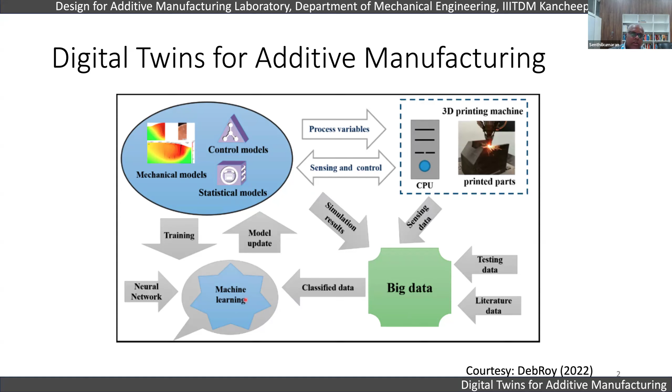So I'll show you what the digital models for a simple powder bed fusion process involve. Starting from the powder flow, powder dynamics, and then how the laser interacts with the powder, and then the fluid flow or thermofluidics of the melt pool, how the melt pool behaves, how the microstructure evolves, and how the residual stresses and distortion form. So a complete coupled model of all this physics is what makes this process much more complex. So a digital twin for AM should consider powder dynamics models, heat source interaction models, melt thermofluidics and heat transfer models, microstructure evolution models, and finally distortion simulation, if you want to understand residual stress and distortion.

In my lecture today, I have focused on studies that we have done on distortion, so I am restricted to distortion, but you can do it for any response. For example, here, the different responses you can study: you can study defects like porosity, gas-induced porosity. You can study grain growth and microstructure, stress and distortion. You can also derive optimized process parameters for a part for any functional requirement.

Right. So for that, from the physical part manufacturing, by conducting a few experiments, you would do a lot of measurements and generate some data, which is sensory measurements and data, like temperature measurements through temperature sensors and other types of sensors. And you also have simulation results. You have micro scale models, which are like melt pool models, mesoscale models, which are layer-wise models, and part scale models. So you need multi-scale physics-based simulation models, and also data from the physical part manufacturing. These are all based on first principles of physics, and this is based on the real-world data collected from the experiments, which actually goes into building the physics-based simulation models.

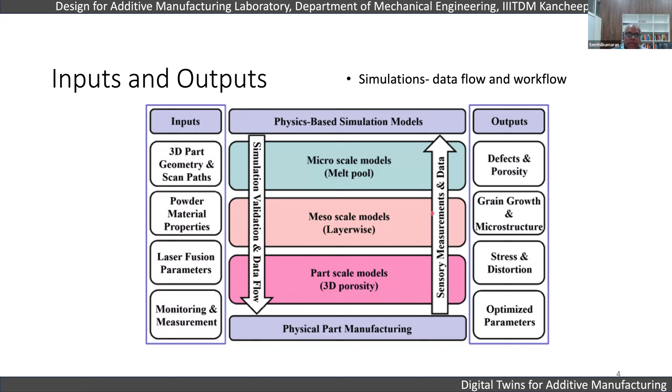In case of a digital twin, you get the same thing. You have the CAD, you have the STL, you have the toolpath, you have the manufacturing process simulation, but you also create a digital twin of it, what is known as a digital system. Here you give the geometric parameters, the material properties, and process control parameters. Then you build a high fidelity model, which is typically a physics-based model.

From that, you run down to a surrogate model, which is typically a faster prediction model, where you have several objective functions, constraints, and a reference trajectory from the domain knowledge, which is given. Now you can use model predictive control from the surrogate model, where you can convert from digital to physical

feedback. So you can see that you have the physical to digital, where you have the measured variables from the physics or from the experiments, and then the predicted variables. They can update the surrogate model parameters in real time. And then you can use MPC, or model predictive control, to control the manufacturing process in real time. So you can see this is a full feedback system using a digital twin.

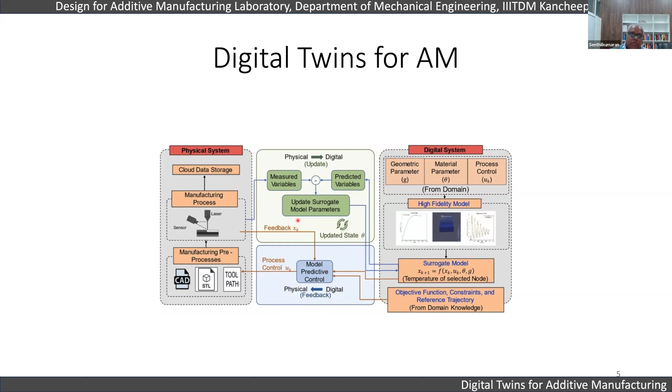Okay. Now in this lecture, I am trying to focus on three important aspects. The first one is how to build such a high fidelity model. And then from those physics-based high fidelity models, how to create surrogate models. And then what are the surrogate models that need to be built for a powder bed fusion process, and how we can use model predictive control on them. This is what we are going to focus on.

So first of all, let us just understand what a surrogate model is. So if you really look at it, as I said, there are empirical, statistical, derived, experimental black box models. And there are white box models because we understand the physics, what's happening. So this is a physics derived relationship, and you have a statistics derived relationship. The black box and white box enter into a gray box, which is data sets that understand the behavior of the system. And some data also come from the literature.

And then we use machine learning models, which are readily interrogatable. You can use supervised and unsupervised learning, especially if you want to do classification and regression, or clustering and anomaly detection through unsupervised learning. And you can also use reinforcement learning to improve the model accuracy and things like that. So you can see that it can be improved.

This is coupled with the sensor data from a physical twin. So in real time, you also have a digital twin to physical twin. Real time data goes into the digital twin. And the digital twin uses model predictive control to control the physical twin. So you can see that this is how the surrogate models are going to work.

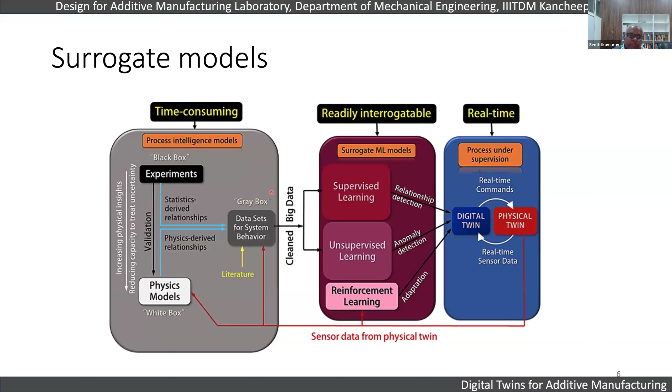So we call this the process intelligence model, which is typically the models which increase physical insights to some level. And this is the surrogate machine learning model, and then the process under supervision. So this is the complete surrogate model. Now, what are the building blocks? This is the overall picture. But when it comes specifically to the powder bed fusion process, what are the different models that we need to build? And what are the connections between them?

Right. So some of the basic building blocks of a surrogate model are a multi-scale model and a multi-physics model. For example, we need to understand the powder dynamics model, as I said, the powder spreading model, which will determine the surface shape, which will be controlled by MPC. And we need a melt pool model; you can see both are in the micro scale. We get the surface morphology and packing density from here.

And then we have a thermal history from the melt pool model, which is taken to the microstructure model. The microstructure model can be used to predict, like Thermo-Calc, other thermophysical properties. And you also use the same thermal history to predict the residual stress and distortion. Thermomechanical properties also come from the microstructure model, because the evolution of the properties is controlled by the evolution of the microstructure. The residual stresses typically happen in the mesoscale, in centimeters.

And structure property relations like cracking, porosity, and lack of fusion can also be determined from the melt pool model. You can get the porosity values and lack of fusion from it. And that could be used to understand the complete process, structure, property, function, behavior mapping. So that could become a full-scale model. This is what we call a multi-scale and multi-physics model. Now, when I say multi-physics, we need to go deeper into the process to see what physics is involved in a typical PBF process.

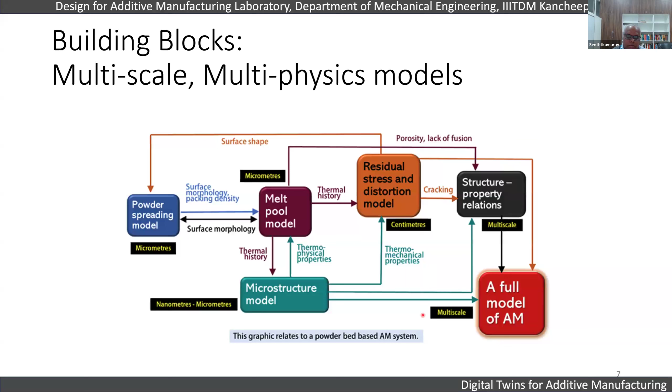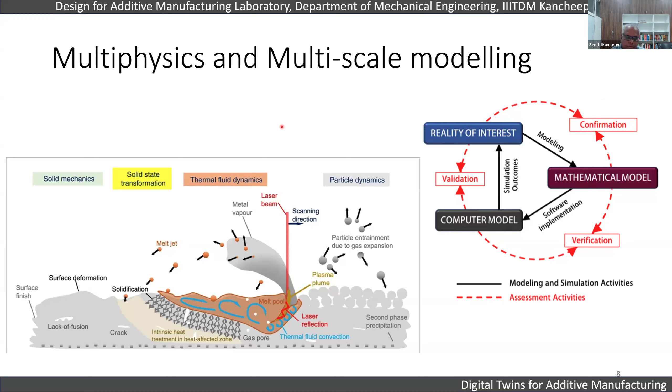So you have to do the validation, confirmation, verification. Once you build the model, it has to be verified with the mathematical model, and the mathematical model has to be confirmed with the reality of interest. So you can see it's a reverse cycle. This is where the modeling input data goes in, and this is where you have to verify the model. In today's lecture, I'm going to show you how we built the mathematical model, how we built the computer model, how we verified it with confirmation experiments at each step.

Okay, first, to start with the thermomechanical simulation. This is the first physics-based simulation that we do. There are many different types of thermomechanical simulation, because when the laser comes in, it heats the powder bed, and it is a thermal process. The heating happens through conduction and convection as well as radiation, which form the boundary conditions. Normally this is solved as a moving heat source problem. You can solve it in many different ways: the simplest is as a Stefan problem, or as a coupled thermomechanical problem, or as an uncoupled thermomechanical problem.

In a coupled thermomechanical problem, you're going to basically change every element after taking the results from the previous simulation. In uncoupled, you first solve the thermal and then bring it to the mechanical simulation, and then update your next iteration for the thermal simulation, right?

So here we have the initial and boundary conditions. The initial conditions are the initial temperature of the powder. The boundary conditions are typically what is happening in the convection, what is happening in the surroundings and things like that. So then we have to model the heat source. Normally, lasers and electron beams are used in powder bed fusion.

So lasers are typically modeled as a Gaussian beam, having full width at half maximum, which has a maximum peak intensity at 1 by e or 1 by e square from the tip of the maximum intensity. And many times they use element birth and death, which is a very old concept, which has been used in many different approaches.

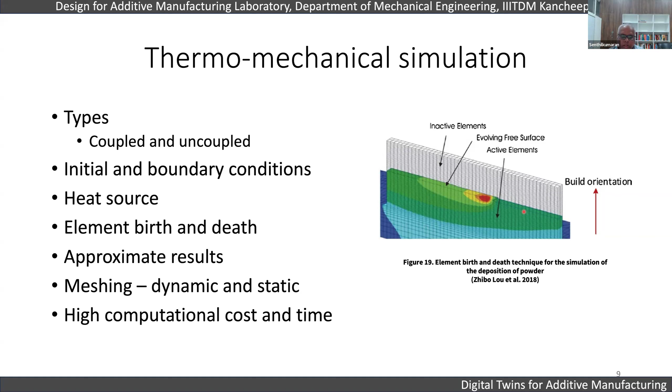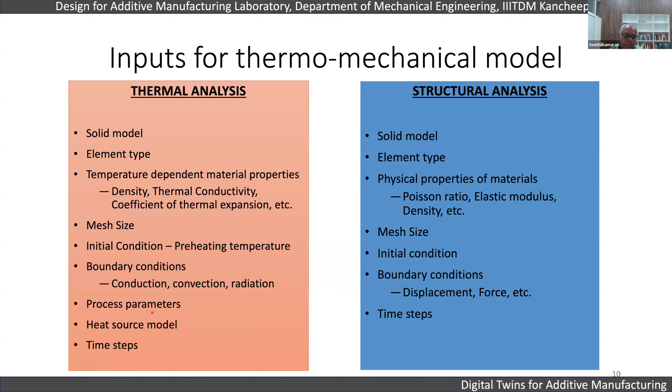So normally you input the solid model element type for the thermal analysis, the density, physical and thermal properties, the mesh size, boundary conditions, process parameters. Here displacement force, here the boundary conditions are convection, and the heat source model is used for the thermal simulation. So normally you take a material model, part model, process parameters, boundary conditions, heat source model, and a dynamic or static mesh scheme.

You do the pre-processing. You iterate for each layer, layer 1 to layer n, depending upon the number of layers in the part. For each layer, you iterate to each scanning track, do the thermal analysis, get the temperature field, apply the mechanical boundary condition, do the mechanical analysis. When that track is done, you go to the next track, until all the tracks for a layer are done, and then iterate for all the layers.

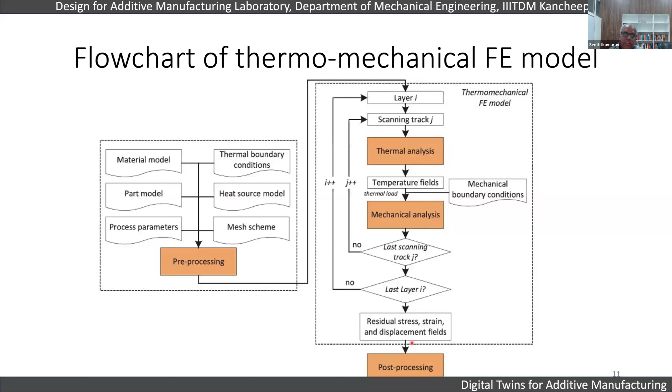Then calculate the residual stress, strains and displacement fields at the mesoscale after you have the temperature field collected over the thermal history, for example T of x comma y comma t, the temperature over time. Then you use that to calculate the residual strain and displacement field using that coupled thermomechanical analysis and do the post-processing to visualize the results.

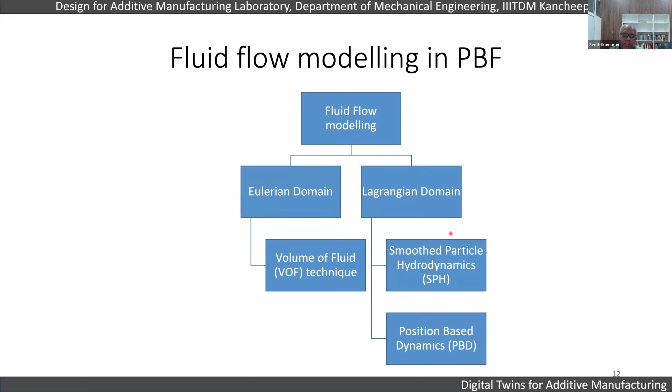So similarly, you also have to do the fluid flow modeling, where you can use either the Eulerian domain or Lagrangian domain. In Eulerian, you can use the volume of fluid technique. Here you can use SPH, smoothed particle hydrodynamics, or PBD, position-based dynamics. So all these approaches can be used. I have not given the governing equations for thermomechanical, assuming many of you are familiar.

Very similarly, here you use the conservation of mass, conservation of energy, and conservation of momentum. And we need to identify the liquidus and solidus zones for the conservation of energy. We use specific heat as a function of latent heat of fusion. So for the liquid region, we define the temperature as above the liquidus temperature. This is the liquid region.

A temperature between the solidus and liquidus is the mushy region, and then below the solidus is the solid region. So we define the liquid fraction and use the liquid fraction for the latent heat of fusion. For example, for most of our material properties, especially powder properties, sometimes we use a bulk property, and they may not be accurate. Then we typically use homogenized material properties for 3D printing, or sometimes the bulk density, sometimes the bulk property, sometimes the powder properties.

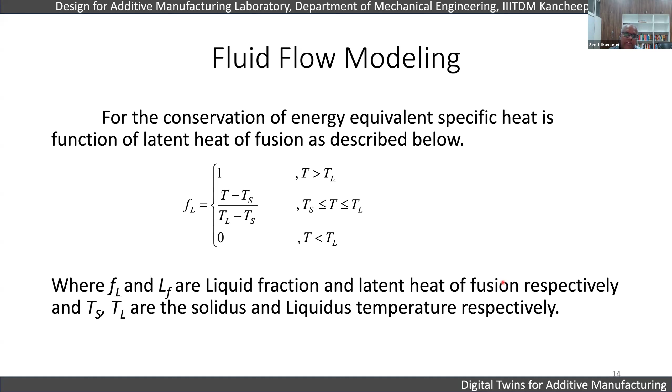But here we also have to use properties which vary with respect to temperature. So we need to take material property as a function of temperature, and then it becomes an implicit modeling scheme. And we solve the conservation of momentum equation. In addition to that, we also give the volume fraction for density. Here you can see the density, specific heat capacity, and also the liquid fraction. All of them are calculated based on the mass fraction of the liquid, from the mass fraction of the solid, and the volume fraction of the liquid. Then we can use these input properties in the simulation to simulate the fluid flow.

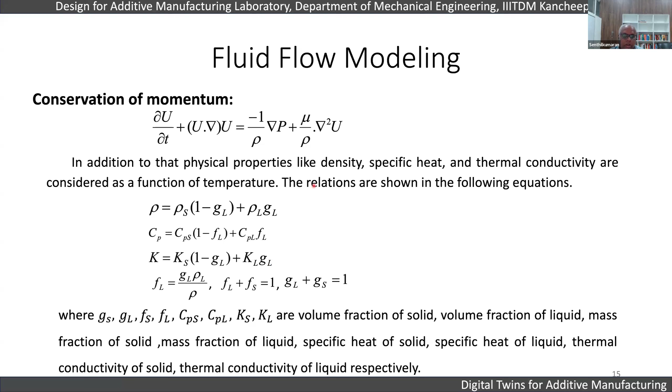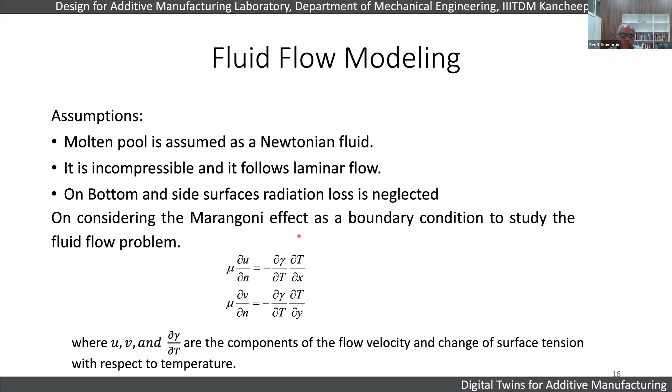And many times, as I said, in thermal and thermomechanical we make a lot of assumptions. Here also we assume it is a Newtonian fluid, incompressible, and laminar. And then we also give an additional boundary condition for the Marangoni effect, which is going to make the fluid flow into the molten zone. So these are the conditions. You can see some of the simulation outputs of the fluid flow, which give us the temperature over time or the velocity over time.

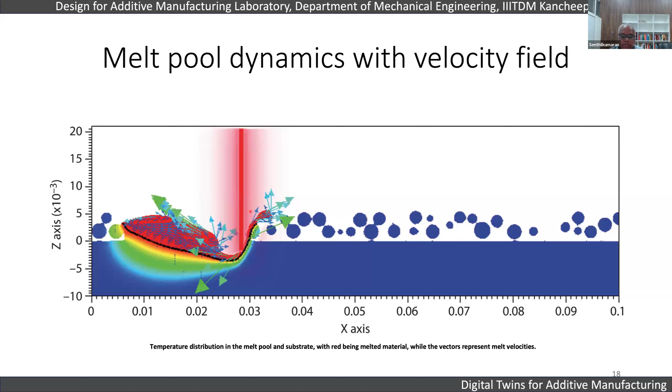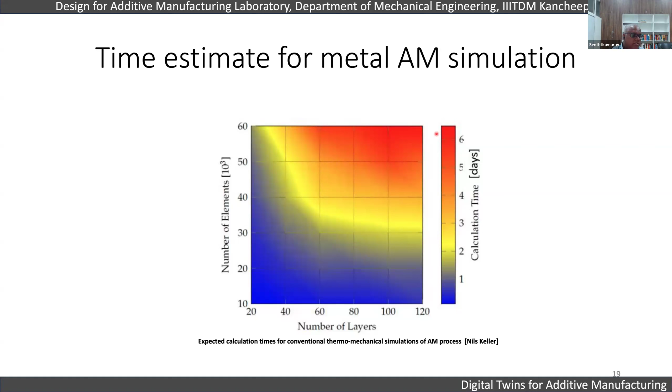So imagine an industry trying to simulate and predict its behavior, and it has to wait for 6 days to get simply a 20 layer or a 120 layer simulation. That is completely unacceptable. So we need to fast track. There are some time reduction approaches. For example, one of the baby steps people have taken is using a coarse and fine mesh combination, called dynamic adaptive mesh refinement. You refine the mesh in the zone of influence: the mesh size is very fine here, a little coarser, and then much coarser where the laser is not there. So you reduce the computational load by reducing the number of elements.

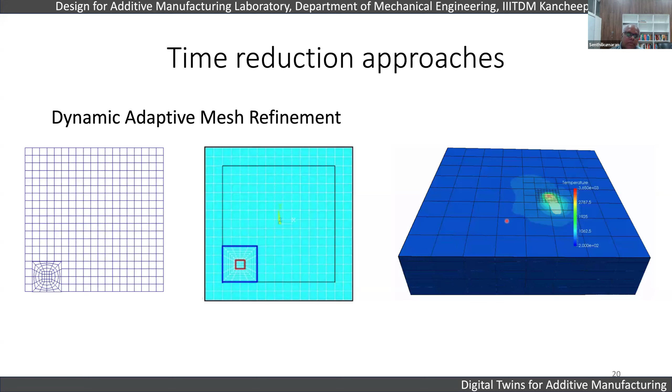So you can see, when you use dynamic instead of uniform meshing, the running time and the file size are shown here. With dynamic, the file size comes down from 7.9 GB to 3.75 MB. And the total running time of the simulation came down almost 5 times, right? So 35 to 7.

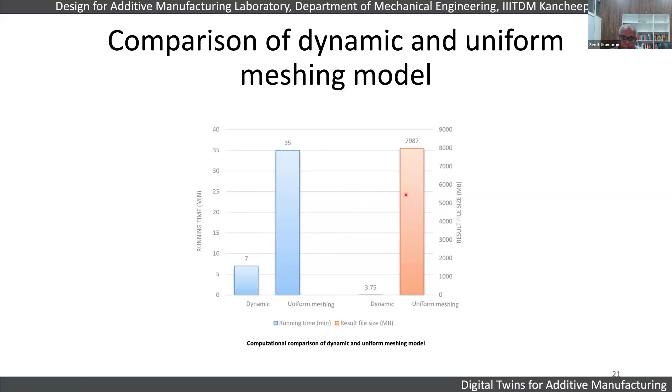So like 5 times. You can see the running time and comparison between the dynamic and uniform. This is one way to reduce the time. So when you use, let's say, a stepwise mesh coarsening, for example, at each layer, each step, you want the step meshes to be coarsened. So you are trying to increase the mesh size after each step, so you can actually reduce the time.

Initially, this is the one approach where you have used uniform meshes for different degrees of freedom. So for 300 layers, the degrees of freedom was somewhere around 1.5 × 10^6. But here, if you use a coarsening mesh scheme, only this is the fine mesh and the rest is coarse mesh. You can see it is reduced to a very small amount of time. So the time reduction approaches are very, very favorable.

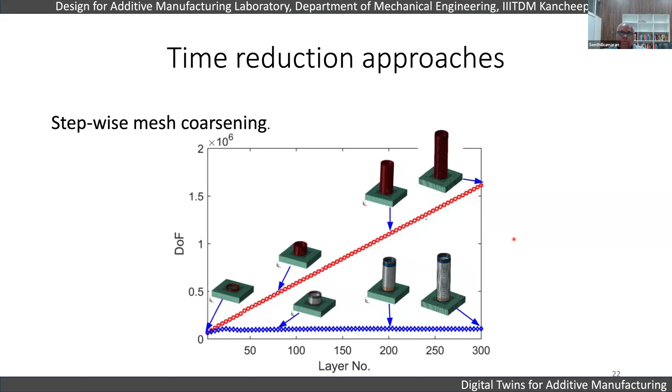And many people try not to do the scanning for individual track paths, but assume each layer is manufactured in one go. This is typically what we call layer-by-layer heating. Instead of simulating the laser movement as a moving heat source problem, people have solved this problem by assuming each layer to be heated and then formed. They had a very approximated simulation wherein the entire layer can be simulated in one go.

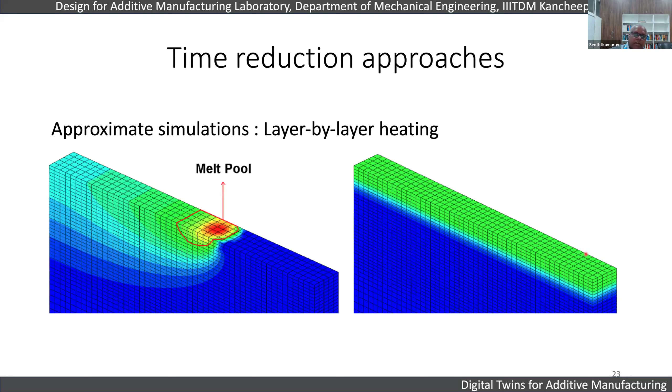So what they did, for a one melt pool simulation, they allowed it to reach an equilibrium condition after a certain time. They built a constitutive model from it, and then they used the constitutive model to simulate each layer. So this is how it is done.

And there are many commercial software you can still use. For example, Autodesk Netfabb, ANSYS 3DSIM, AdditiveLab. I'm not exhaustively listing all the tools, and I'm not endorsing these softwares as fit for the purpose. Just for people trying to first wet their hands with simulations, you can use these commercial tools. The licenses are available; you can try them. What I'm trying to say is you can build your first simulation models using them.

Most of them have come from the academic world. For example, this one came from Professor Brent Stucker, who is the author of the famous additive manufacturing textbook. He worked at ANSYS for quite some time; now he's happily retired. He formed a company called 3DSIM, which got integrated with ANSYS, and it uses a very interesting thermomechanical modeling approach. You can see his papers, how the methodology was developed and integrated into ANSYS 3D simulations.

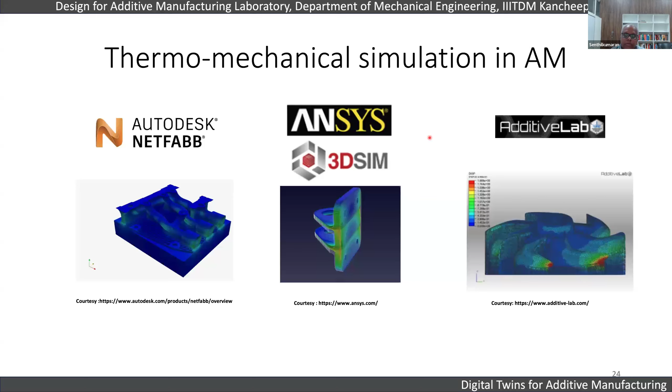And Autodesk Netfabb came from another university. AdditiveLab came from another university. Many universities have developed the simulations, and then they've been commercialized by software majors.

Another important idea that came into macro scale simulations is the inherent strain method. For example, if you want to do distortion prediction, you have to do the thermomechanical simulation, take it to part scale, and then do the residual stress and distortion calculations from the temperature field obtained from the single track simulation. But instead, Nils Keller and others have adopted the inherent strain method.

It's not like the inherent strain method is recently developed. These methods existed for the welding process for the last 30 years. In an inherent strain method, you take an STL file, like a cantilever specimen which has these cantilevers. You input the heating, process parameters, hatching patterns, and material properties, and then you estimate the local inherent strains from the experiments, because you are going to cut this off from the build plate.

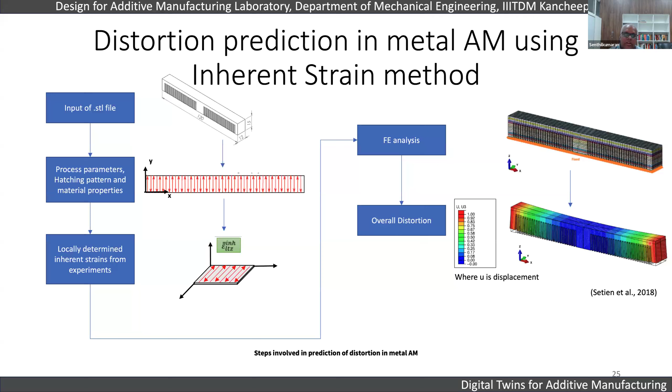So then it is going to basically deform like this. You can see the deformation happened because of the relief, residual stress is relieved. So you measure those strains, and then you solve the inverse problem to get the inherent strain from the measured strain value.

So for that, Nils Keller has developed a very interesting methodology. In fact, his software is also commercialized. So here you can actually do a micro scale heat source model and a mesoscale hatching model. Then you can take those inherent strains measured from the cubic heat sources and put those inherent strains here. So you have a bulk material for the individual layer. You can actually do the inherent strain in the macro scale layer model.

So this is done using simple experiments. You can see that you have different kinds of hatching strategies, and then different levels of deformations you can get. So the scanning pattern has a larger influence on the strains that you can measure. And using the simulation, you verify the measured values of the deviations against the simulations, and then you can use that to calibrate in the software.

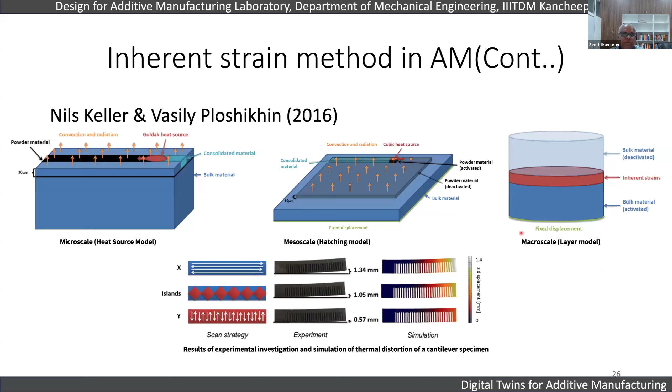So the calibration happens like this. You print the cantilever specimens along multiple directions, like parallel to X, parallel to Y, 45 degrees, and also 135 degrees and things like that. You can print all the cantilever specimens. You can change the scan speed, layer thickness, laser power, scan strategy.

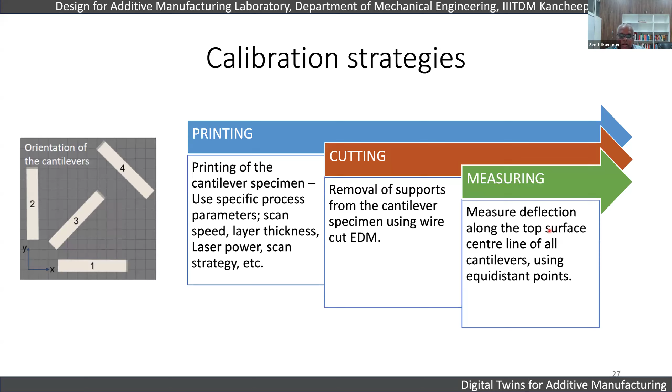And then once you remove the supports from the cantilever using wire EDM and remove it from the build platform, it will deflect. Measure those deflections along the top surface, along the center line of the cantilever, using equidistant points for each of these cantilevers, and then input that into a calibration software. So for example, this is the measured inherent strain. These are the different samples that you have tested: 0-degree sample, 45-degree sample, 90-degree sample.

You input those deviations, whatever you have measured, and then you can calculate the inherent strains, which will be used to calibrate that inherent strain for different calibration steps, like 25, 35 calibrations you can do for different orientations. You can find the maximum target and the maximum deviations from the simulations, and then you can define the layer thicknesses, and then you get a constitutive model. And this model can be used to simulate.

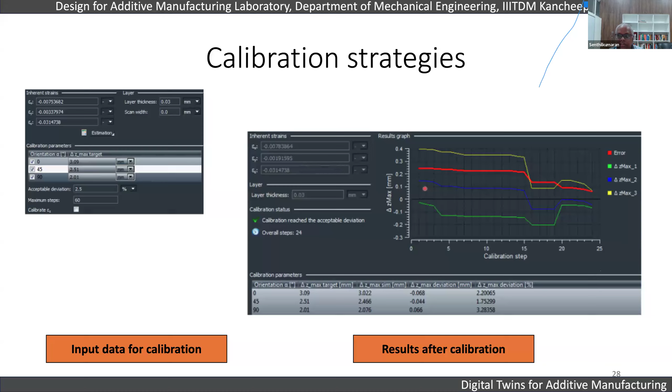Okay, so let me just show you one of the inherent strain methods. I have a huge bunch of slides explaining the inherent strain method. For the want of time, I'll point you to some commercial softwares which use the inherent strain method. For example, Simufact Additive, which also uses inherent strain method based models to simulate, Amphyon from Additive Works, which is Nils Keller, and GENOA from AlphaSTAR. So you can see some of those tools which actually use the inherent strain method. So these are much faster, right?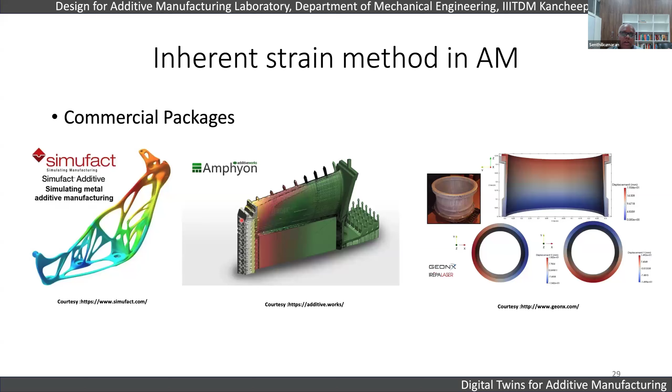And another important thing is, we are doing all this for calculating the thermal history and the fluid flow dynamics, and then we have done part level simulation with inherent strain. But next we need to also look at the structural models, like microstructure evolution models. So how do I then correlate process, structure, property? How do we model them? For that, you need to work in different length scales.

For example, microstructure representation. There are a sufficient amount of publicly available coding schemes; for example, you can use cellular automata, or stochastic modeling techniques like Monte Carlo, or physics-based models like phase field to generate microstructures for additive manufacturing. In fact, from Sandia National Laboratories, you can use the simulation tool that is already available. So you can use already existing open source codes to generate microstructure from AM, and those inputs come from the process modeling.

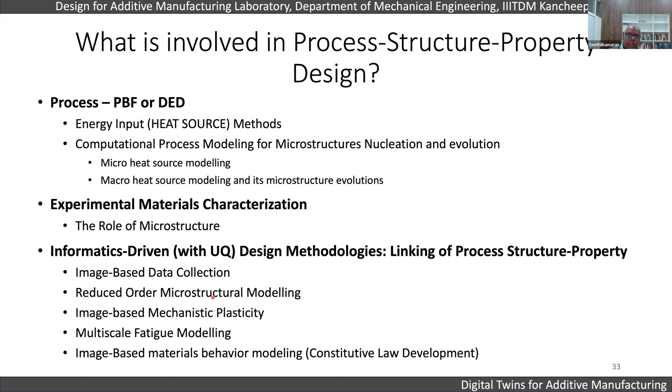And when you do the integrated approach, like for example, when you are integrating the computational tool set approach, right? So we need to understand the process structure. For example, first one is calibration of the thermal response. Second is the microstructure evolution analysis, and then the experimental study of the process parameters. And we have to then create a macro scale thermal modeling. From that, we have to predict the properties like ductility, residual stresses, UTS, and elastic property.

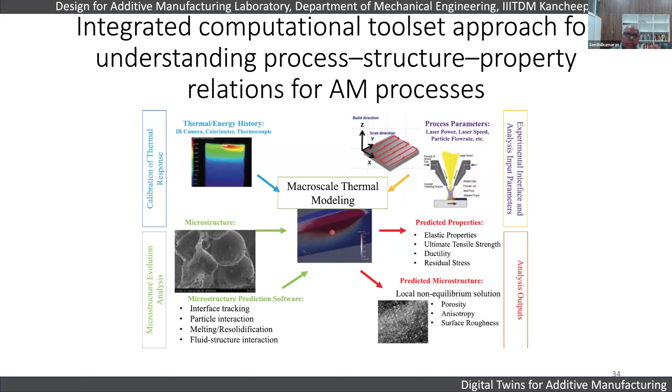And also from the local non-equilibrium solutions, you have to also understand porosity, anisotropy, and surface roughness and all. So you can see that it is a very involved, much more complex teamwork that needs to be built to basically do it.

So when you couple experimental work, for example, when you have a microstructure formulation from process parameters, this is an example from DED, directed energy deposition, you can understand how the fine coupled experimental and computational framework can be used in concurrent multi-scale coupling. That means you are taking results from the macro scale and then using those results in the micro scale, and then again taking the data to the meso scale to basically again influence it in the macro scale.

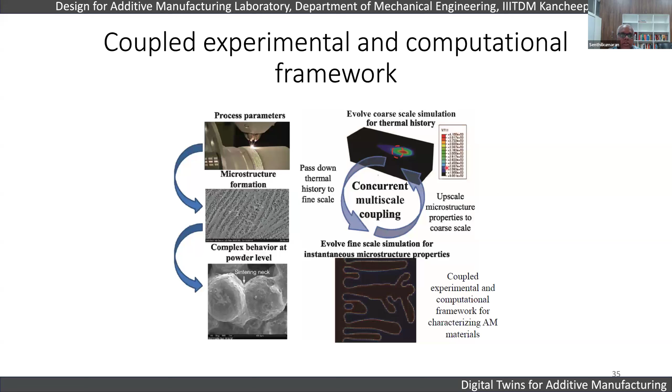So this is the coupled multi-scale where you pass down the thermal history to each fine scale over time, and you upscale the microstructure property to coarse scale. For example, from the micro scale, the properties are upscaled to the larger dimension of the coarser scales, but the thermal history is passed on to the micro scale and the fine scale. So you can see that this is how the coupled experimental and computational framework can be used.

And the linkage is always very difficult to get. For example, you have different process groups like DED, lasers, electron beam, different materials, right? So different thermal inputs and different kinds of process parameters, which results in different grain structures. And you have to test them using coupon testing, destructive testing to understand its mechanical behavior. So the design loop involves finding the optimal process parameters and linking process to structure to property. So a complete link between process, structure, and property needs to be established.

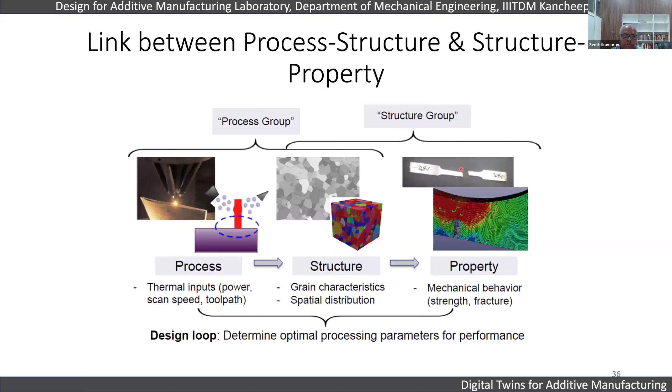So a lot of experiments are also needed while you get these results. For example, sometimes you may not get the result that you want. Your residual stress predictions may not be proper. So you need to use a lot of characterization techniques, microstructure characterization and mechanical characterization for strength, toughness, creep, fatigue. For microstructure, we have to use SEM, EDX, EBSD, TEM, AFM, and XRD.

XRD is a very low-cost technique for measuring residual stresses on the surface. If you want to measure subsurface residual stresses, you can go for expensive methods like neutron diffraction and other methods. So you have to employ these characterization methods to validate your scale-to-scale transformation of the property to function.

And also you have to use mechanical characterization to basically qualify the process to structure relationships, right? So these are all to be used. From process to structure, we have to use this set of characterizations. And then in properties to performance, we have to use this set of mechanical characterization tests. So this is how someone doing research to build a digital twin has to focus.

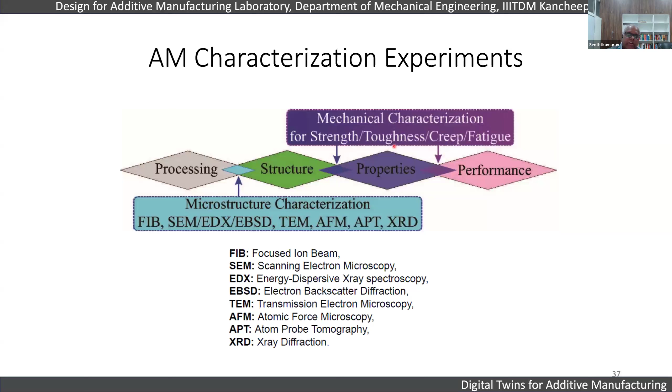Okay. So next I'm going to show you some basic work that we have done in the building blocks leading to multiple physics, in our lab. These slides are from one of my doctoral students, Dr. Hemnath, who graduated a couple of years ago. His approach was an FEM simulation for temperature, and he simulated thermal data sets for various process parameters, and he used a machine learning algorithm like GPR, Gaussian process regression, to predict the thermal history. And then he used mean absolute prediction error to check the validity.

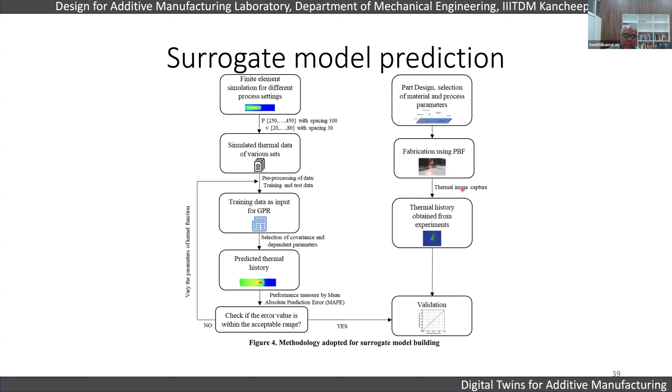And he simultaneously did the fabrication using PBF. He input his thermal data obtained from the experiments to fine-tune and validate those results. So this is how he has done it. The overall methodology is like this. You build a surrogate model at different scales. We built not just a surrogate model in one scale, but this is for the micro scale, this is for the meso scale, and this is for the part scale.

For example, in this scale, we built a temperature prediction model from the surrogate model. And we also built a distortion prediction model here. And then we used shape descriptors assessment for shape description. So we used temperature prediction models where we did a FEM simulation, simulated thermal data for various data sets, and trained and predicted thermal history. So this is the first part.

And the second part, we did this to prove that it works in the mesoscale. We took some complex structures which are very unique to 3D printing. One of the things that we selected is a strut-based lattice. You can even choose surface-based lattices, but we used strut-based lattices to prove that a distortion prediction technique can predict faster for those kinds of very intricate geometry. So that's the methodology that we have adopted.

We designed the unit cell for the lattice structure, simulated the residual stress and distortion. We generated the data sets, and then we trained using an artificial neural network model, which is our surrogate model for the meso scale. And then we very uniquely defined something known as shape descriptors, which can even fast track the simulation by evaluating 2D shape descriptors from the 3D part.

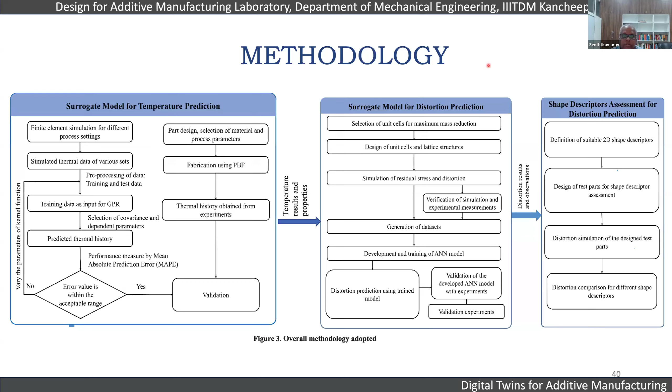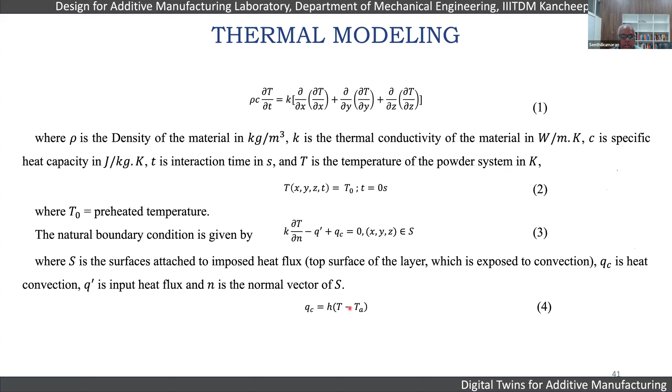So thermal simulation, first we started with the thermal modeling. We started with this energy balance equation for a three-dimensional heat conduction problem. And this is the initial condition, initial temperature, and then the heat source is modeled as a moving area heat source. And then we defined other boundary conditions like convection and radiation. So this is the normal way we build a FEM model.

Then we defined the Gaussian distribution function, since the heat source is modeled as a Gaussian heat source, and we trickily used velocity here. Since it is moving along x, we used velocity along the x direction. So as we increase the velocity, we move the laser along x, so x gets varied when the velocity, speed, and time get varied. So for each time step, we are able to move the laser over the path.

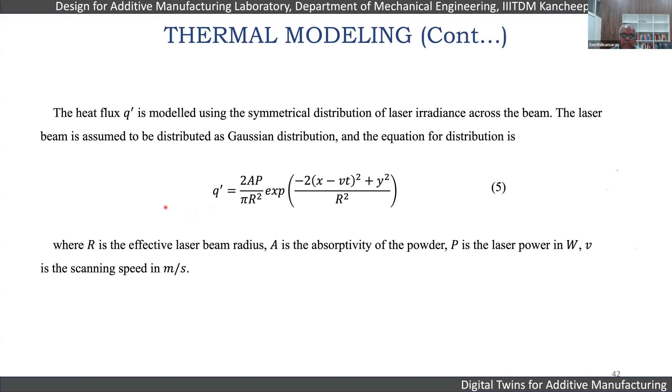And we also calculated the absorptivity based on a particle dynamics model. The absorptivity typically influences the total energy input. So from the particle dynamics model, we calculated the absorptivity, and that is effectively used here as the absorptivity of the powder. And then we have used this expression with laser power, and Q prime is the distribution of the heat flux, which is to be input in ANSYS.

So we made certain assumptions here. We use the laser beam as a heat flux with a Gaussian distribution, and the material we have considered isotropic for simplicity. And absorptivity is considered to be the same as that of the solid material. As I said, the absorptivity of the powder we calculate from the particle dynamics, and then we created an equivalent absorptivity corresponding to the same solid material.

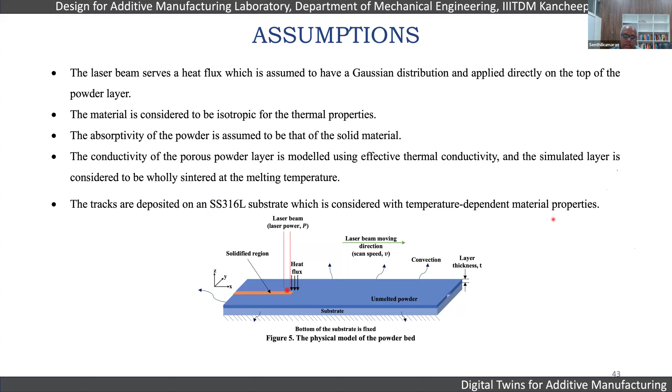The conductivity of the porous powder is modeled as effective thermal conductivity, taking into account the powder particles. We took the conductivity of the air plus the conductivity, we know the volume fraction, the packing factor of that powder bed, and then we used the effective thermal conductivity as a material property. And then we used an SS316L substrate, with temperature-dependent material properties.

So what we did is, as I suggested, we have the input process parameters as different feature vectors, and we ran multiple simulations, and we understood the dependence of the dependent variable, the temperature, on the different process parameter inputs, and then we trained the surrogate model. And then we are able to get an output. Simulation is a very expensive way, but by training and employing a surrogate model, which is relatively inexpensive, we are able to improve the efficiency of the analysis.

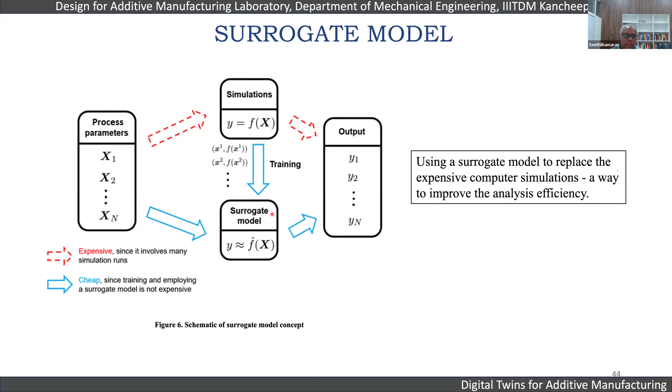In the GPR model, one very important thing is how to do the hyperparameter tuning. So we use the Matérn 5/2 kernel function. After we tested many different functions, we found the Matérn 5/2 kernel function to be more effective in the case of temperature prediction. We saw this during our hyperparameter tuning. This is the covariance function that we have used in the Gaussian process model.

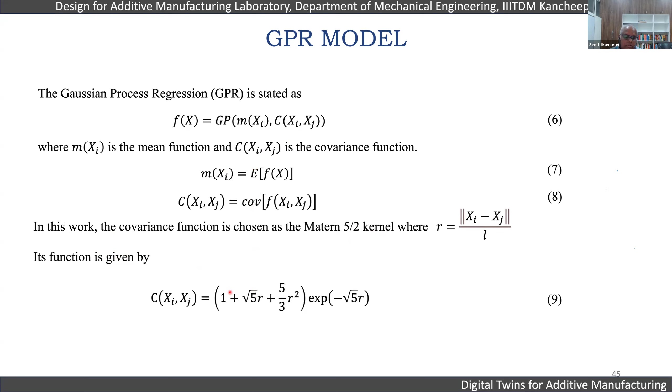In simulation, it doesn't matter. But for experimental validation, since we are going to do an experiment, you have to choose a material, you have to choose a substrate.

But for simulation, you can do it for any material. But when it comes to validation, you have to pick and choose a material to do validation. So we did some validation studies with the powder bed fusion machine, which is built indigenously in India in RRCAT. We have utilized it because it has got a lot of sensors to collect data, temperature data. So we utilized this particular machine because it has got an infrared camera to capture the temperatures and also do some studies on the powder bed. So this is the bed, SS316L.

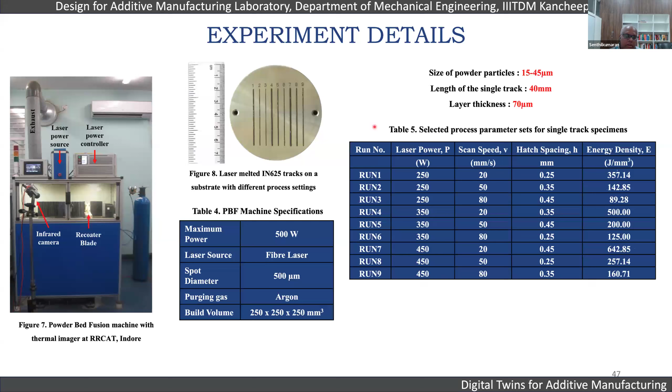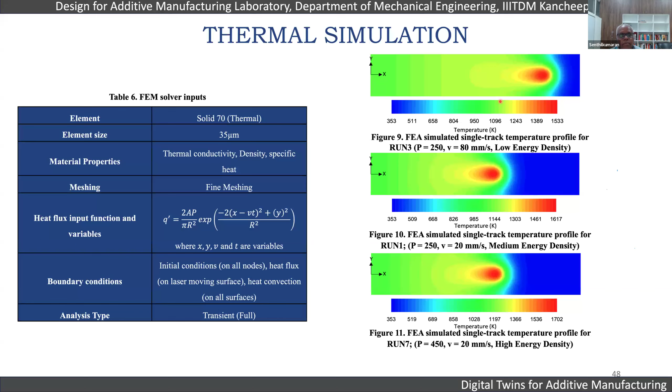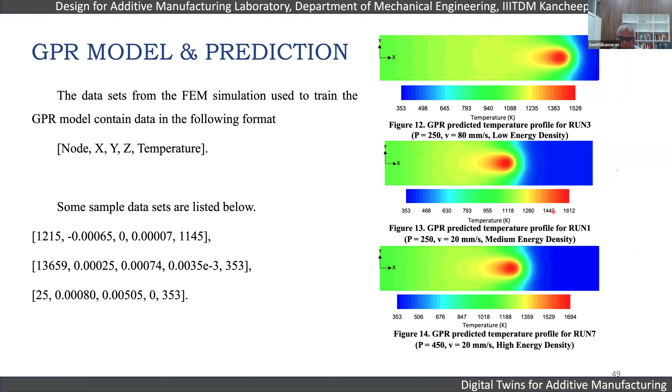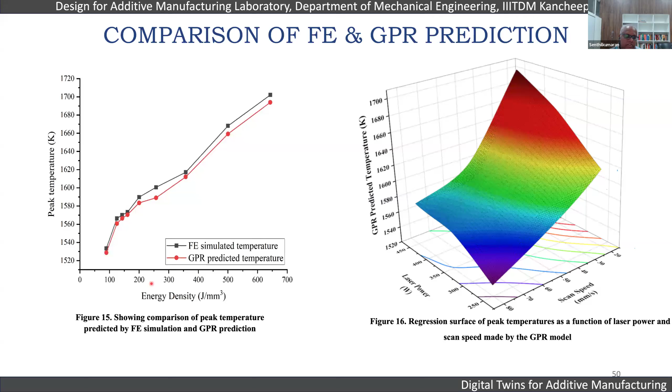For example, the temperatures are up to 1600 to 1700, 1680, which is again the melting point of Inconel 625. You can see a close correlation of the results between FE and GPR predicted over a varied range of energy densities. Energy density is calculated by P by V into H. So this is the peak temperature that is being obtained.

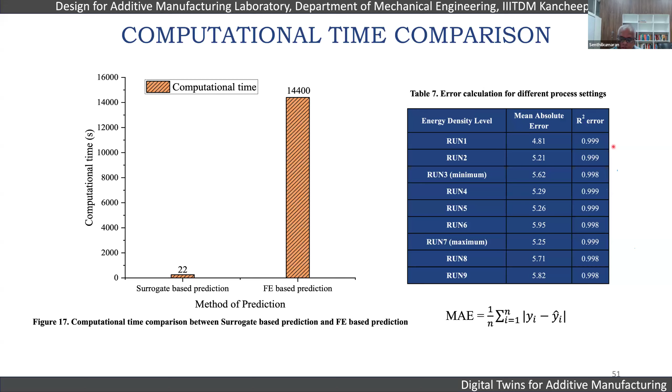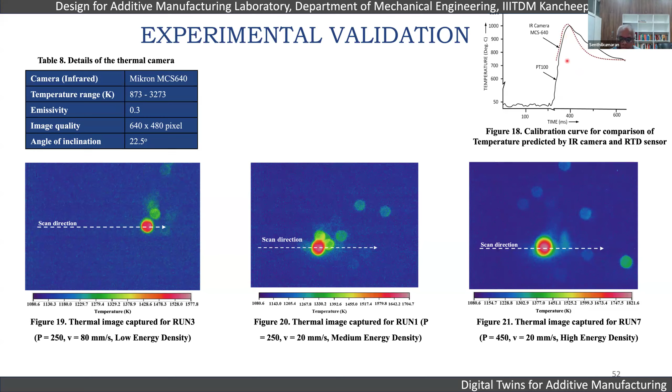And we also calculated the mean absolute error, and then we also did a temperature validation. Whatever temperature we obtained, we did validation studies with the thermal camera. So we measured the actual temperature profiles using the thermal camera, and then our simulation is getting validated. We did the calibration of the camera for its accuracy over a wider temperature range. You can see that the FE predicted, the GPR predicted and the experimentally measured temperatures are in close correlation.

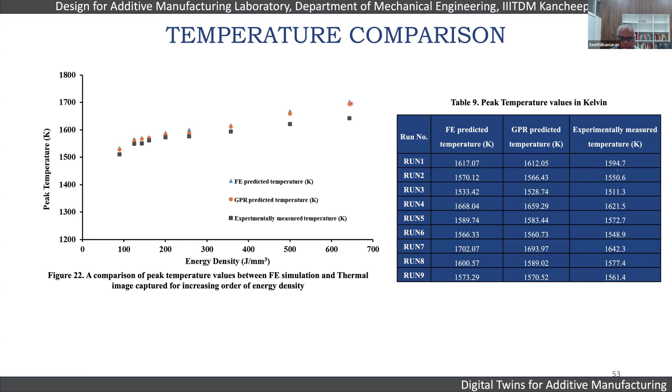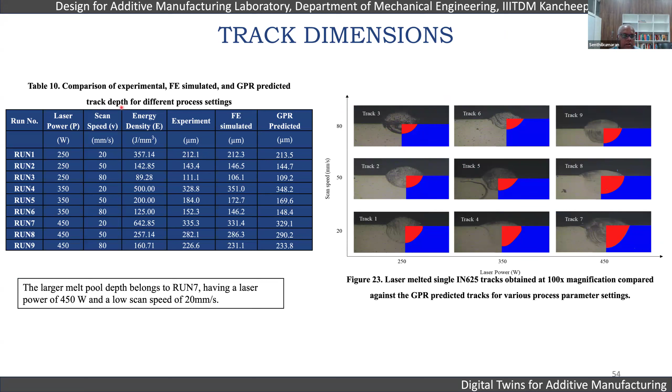So we also were able to get the track dimensions to pass on into coupled thermomechanical simulations. Based on the solidus and liquidus lines, you can see that the GPR predicted width and track heights can be predicted. So we have finally seen that the FE predicted, the GPR predicted and also the experimental depth are closely correlated here, and the error is much less.

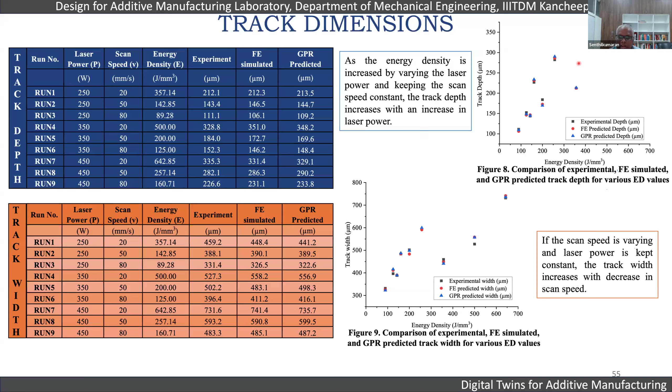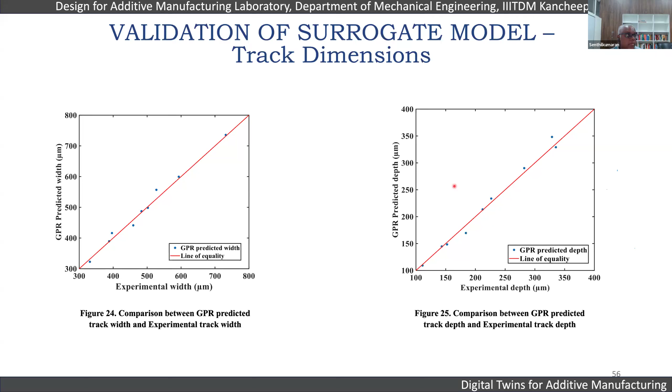So you can see the line of equality; the GPR predicted width along with the experimental width is falling in line with the line of equality, and also here for the depth. This is for the width and this is for the depth, and we are able to predict more accurately. So then we did the distortion prediction, where we wanted to select a few unit cells and then study the residual stress and distortion.

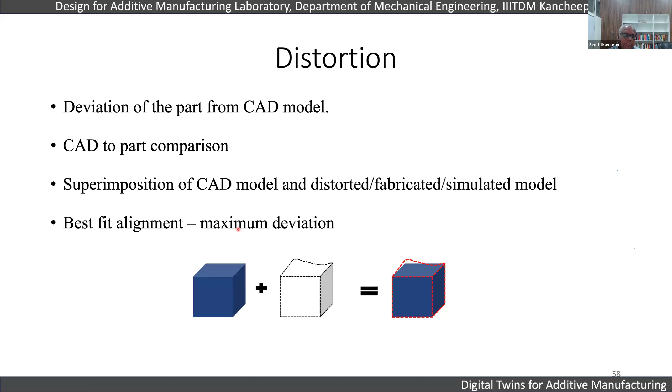But here, one of the important things is we wanted to define distortion as a three-dimensional deviation. And we took the maximum deviation by comparing CAD to part. So CAD to part comparison has been used as a means of defining distortion. Under the best fit alignment, whatever is the maximum deviation, we consider this as the value of the distortion. We define it that way.

And then we did the same machine, same experimental plan, but we did cubical specimens, using an alternate XY scanning strategy. This has been used because it is known to cut down the residual stresses much better than only parallel strategies. So this is considered to be the best in terms of arresting the residual stresses. So we used this particular kind of scan pattern and did a few experiments with Inconel 625.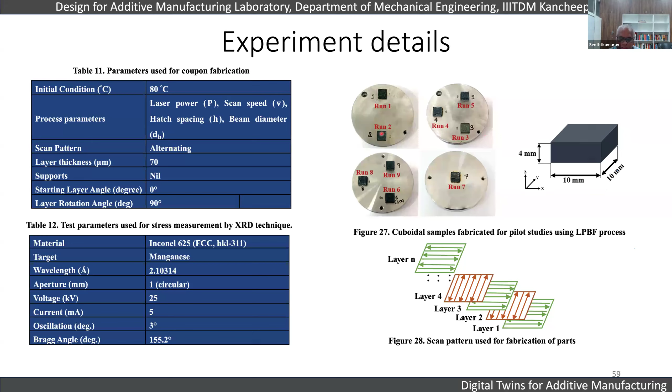And then, to our surprise, some of the commercial tools were not able to give the residual stress predictions. For example, we used a few commercial tools, I don't want to name them, for simulating the residual stresses. For FEM, we did it with ANSYS, but for microstructure and distortion simulations, we tried a few of the commercial solutions I showed there.

We found that the experimentally measured residual stresses using XRD and the simulated residual stresses along lateral and long directions have a huge difference. I'll show the difference in the table here. Here you can see the experimental and simulated values. In some cases, for run 4, you can see there's a drastic change. Somewhere the simulated distortions are matching, but for some parts it is very difficult to get the measured residuals.

So as I said, in 3D printing it is always very difficult to measure the distortions and also correlate them with the simulation. So we have done it with several software, not just one. We used several commercial tools which can give us distortion and residual stress predictions. And we found that many of the software fail to give accurate results, partly due to the fact that our measurement method is also not so accurate.

For example, we use XRD, which is only a surface measurement. We have done measurements before cutting, after cutting, and also after stress relieving. But we have only compared the residual stresses measured before cutting, because otherwise the stresses would have been relieved. We have seen that even the simulations before cutting could not yield comparable results in some cases. So we found there's a drawback in using stress values from the commercial tools.

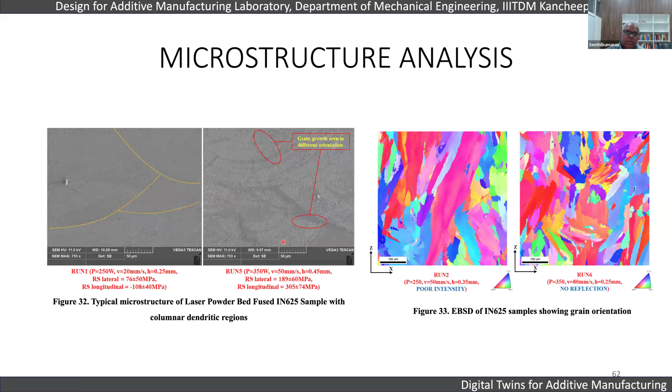So then we tried to understand it more in depth, to see why simulations fail. We did EBSD for 2 samples, run 2 and run 6. Run 2 has poor intensity, and for run 6 we could not get reflections. We found some issues with the grain orientations, because looking at the laser power signature, we could see that the energy density is much lower here. These are the 2 parts with much lower energy density, where the solidification has not happened properly. The grain orientation is very random, which helped us understand that residual stress for lower energy density becomes much more difficult to simulate in the software.

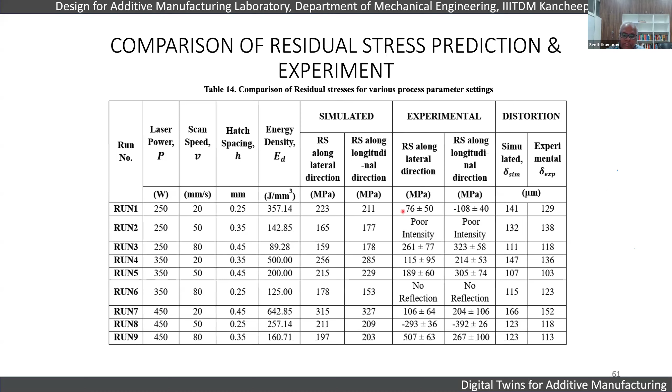But when you use very high energy densities, we get comparable results, and you can see sometimes you get a compressive stress, sometimes a tensile stress, because there are positive and negative values. So with all these learnings, we chose the one software which gives us a lot of confidence in terms of comparable results with the experimental results. We selected that data as the data for training the AI. So we used those simulations.

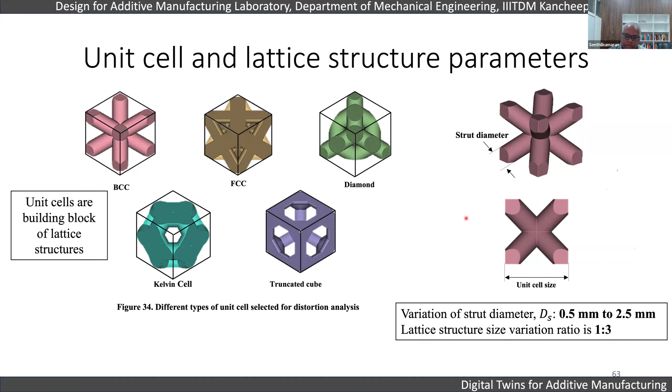So here we used different types of unit cells. First, we wanted to understand the size effect. So we varied the strut diameter from 0.5 to 2.5 mm. We tried to maintain the lattice structure shape by maintaining a 1:3 ratio for the size variations. So first we studied the size variations, and then we studied the shape variations.

So we tried to basically simulate the distortions for different lattice structures, just starting with the unit cells alone, and then we built at the part level. Then we had a few results based on it. For example, this is the size effect. As obvious to us, we have found that the maximum distortion is for a larger size of struts, because size effects are always going to increase the stresses.

For smaller sizes like 0.5 mm strut diameter, we have found that it has got the minimum distortions, but strut sizes larger than 2.5 mm had a very high distortion. So these are the process parameters that we have used, and we found the Kelvin cell typically has the lowest distortion because it has got higher surface area, whereas for the rest, for example, truncated cube has the lowest distortion.

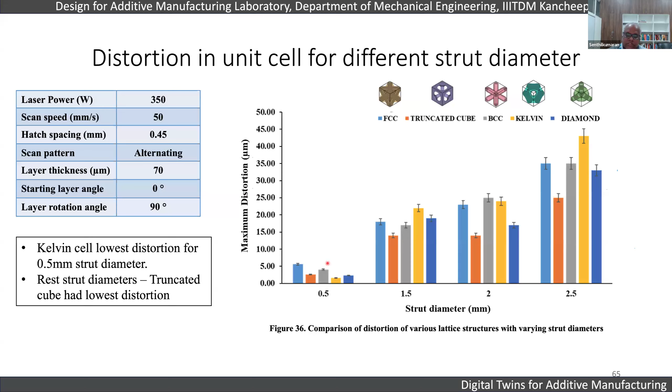For example, here in this lowest distortion graph, you can see Kelvin always had the lowest distortion in most of them. The Kelvin is the yellow one, so you can see the lowest distortion among all in the lowest strut diameter. So then we designed some parts with the same unit cells, and then tried to do the validation of the residual stresses that we have measured for building the part scale model.

So these are the predicted distortions of the parts, which use the diamond, truncated cube, FCC, BCC and Kelvin cell. You can see that FCC cells have the highest distortion here, whereas the lowest distortion is for the truncated cube, which has the distortions at the lowest level consistently along all the unit cells. But for FCC, at the higher unit cells, its distortion performance was much lower compared to other shapes. So these are important observations that we made based on the simulations.

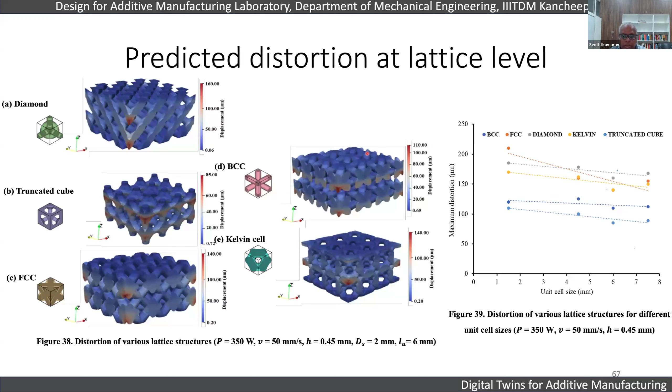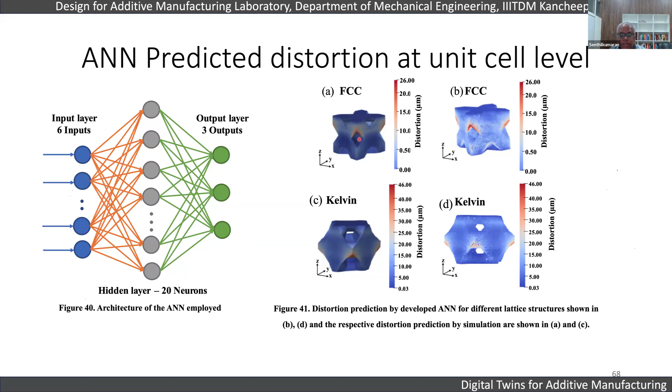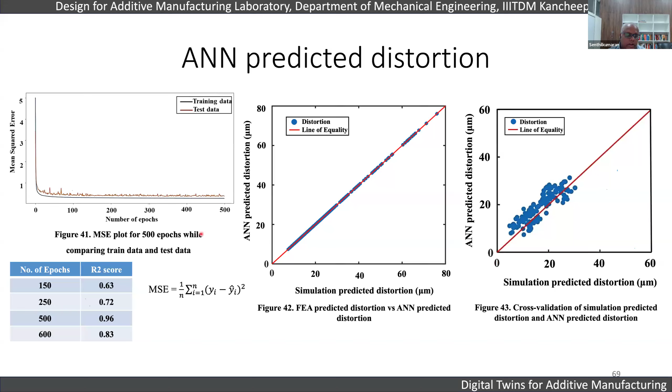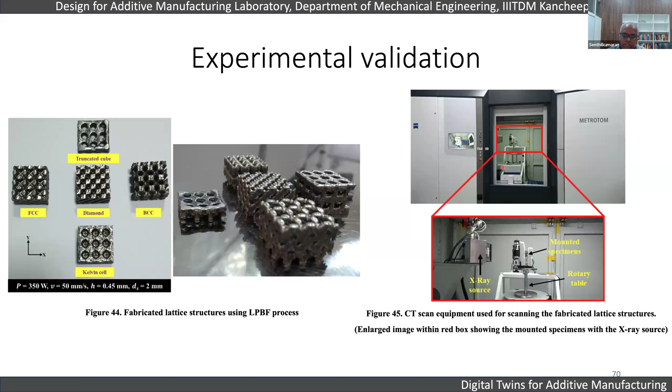So you can see that we can get an R square value of highest 0.96 at 500 epochs. So we trained for 500 epochs. And then we did an experimental validation with the Inconel material. To understand how the distortions happened at the interior of the parts, we did a CT scan using computed tomography. This is one example of a micro CT analysis for BCC, Kelvin, and diamond structures. You can see the distortions at different process parameters.

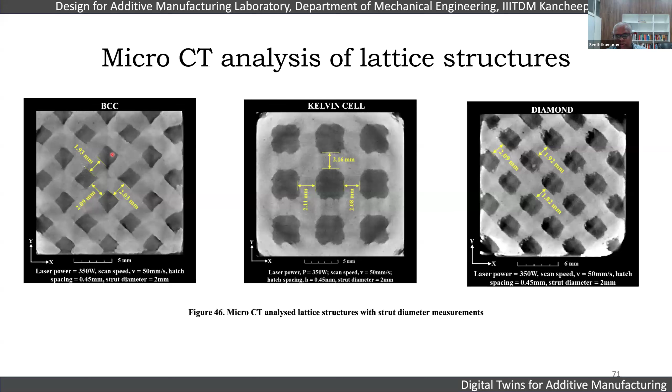One of the very important learning outcomes is that when we use struts of very high diameter, we get high distortions. When we use struts of lower diameter, we get lower distortion. But the distortions are always on the positive side, meaning in all the 3 dimensions, only one dimension has values less than the nominal dimension, whereas mostly it is above the nominal dimension.

So we then tried to validate the distortion. We compared the simulated value to the ANN, and we also did a part-to-part comparison by reverse engineering the cells and comparing the simulation results with the reverse engineered part scale maximum distortion. The truncated cube we could not successfully fabricate, but all others we could. You can see very close correlation between the simulated and experimental values, except for diamond cells, where the experimental value was much higher than the simulated and ANN predicted value.

So you can see the ANN predicted value was trying to average out the experimental and simulated. Since it takes the input of both the experimental data as well as the physical data, it is able to closely work in the nominal zone of dimensions. So reduced error and reduced order models are being used, right?

So this is the typical strut diameter of 2 mm with a unit cell size of 6 mm in a 20 by 20 by 12 mm cube. So a relatively very small part, but for a large part, these distortion levels could be even much higher.

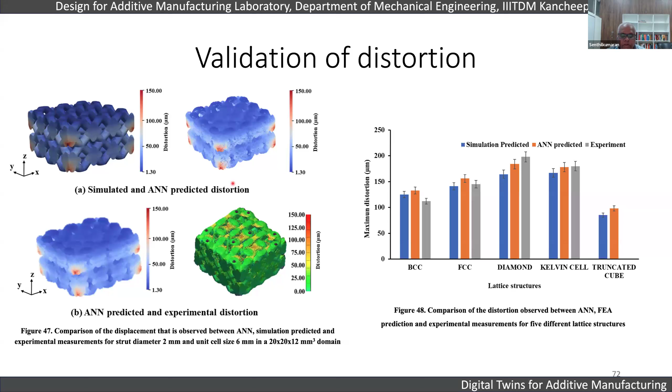So with this, I want to basically summarize and then take a few questions. So one of the biggest challenges that we have faced in building a robust digital twin is the data quality, because right now we don't have very good simulation tools where the data quality is very good, and input material property is also very difficult to verify and correlate.

So we have used some Bayesian inference techniques to do the uncertainty quantification on the input model parameters. We are currently working to improve the input data by using the uncertainty in material properties and things like that. And faster qualification is always a challenge. Because of the time-consuming nature of the work, many people don't want to build such models, and verification and validation takes a lot of effort.

And there is a huge variability in the process, because you try to validate for one material, one technology, one process, but look at the current PBF world. We have Chinese machines with very small build volumes to large build volumes, like 1 meter by 1 meter, 800 by 800, 700 by 700. So there is a lot of variability in the technology, the material, and the process. How far can your physics-based models and data-driven models understand that variability and bring it to scale? So that's another challenge.

And every day new materials and processes are being improved. So bringing the data set into the digital simulation, building a digital twin for it, is going to be another challenge. The first principles are independent of the material data, but the experimental data is dependent on the material data, and combining them is going to be really a challenge. For example, you can always change the material property in physics-based simulations, but experimentally derived data only pertains to the material system used in the experiment. Those challenges are always there when you use physics-based AI.

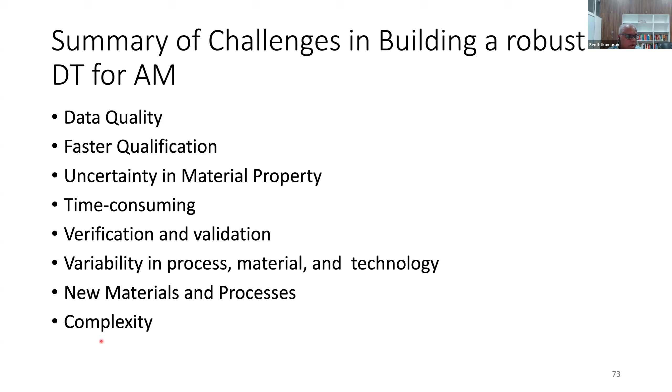So with this concluding remark, I would like to allow a few questions. Thanks for this opportunity. I'll take a few questions. Yes, Professor, I'll read them out one by one. Okay. Actually, I have consolidated them, Professor.

Ravi, one of the participants, asked: can we perform extended FEM of AM processes for composite materials using MATLAB and Python?

Okay, see, the only issue is that composites can be analyzed in most of the multi-physics models. So composites can be modeled, composites can be simulated, but processing of composites is to be done, I think, through the additive processing of composite simulation. See, there are two things. One is simulating the properties of the composite materials and understanding the behavior of the composite materials, or simulating the entire manufacturing process of making the composites.

So for simulating the properties of the composites, yes, we can do simulations, but for AM-based fabrication of composite materials, yes, it is possible. For example, some of the particulate composites that we can make, the graphene composites, people have successfully simulated. Even for electronics applications, some of the carbon-based composites people have simulated, and even some of the polymer systems, aluminum plus polyamide, multi-material systems, and even some alloys.

So it is possible to make a particulate composite, but for fiber composites, I think there are few efforts in modeling them, understanding and developing digital twins, but I am not aware of any commercial tool that can ready-made give you the process simulation for composites manufacturing through the AM route. You can use COMSOL or ANSYS, but still they are general purpose tools. They can predict the properties of the composite, but not actually the manufacturing of composites.